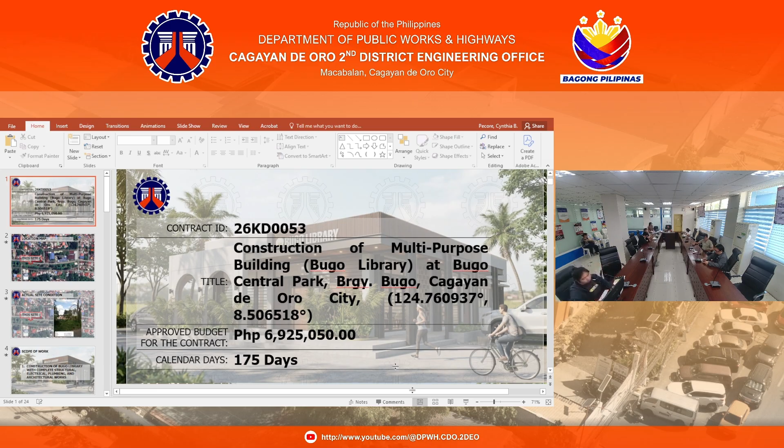This pre-bidding conference is conducted pursuant to the IRR of RA 12009, also known as the New Government Procurement Act. The purpose of this pre-bidding conference is first, to clarify any provisions, requirements, and technical specifications indicated in the bidding documents. Second, to address questions and concerns from the prospective bidders. And third, to ensure that all bidders have clear and uniform understanding of the project requirements prior to submission of bids. Please be reminded that all statements made during this conference shall not modify any provisions of the bidding documents unless such modification is issued in writing through a supplemental or a bid bulletin duly approved and issued by the BAC.

At this point, may I request from the planning and design section to present the following project details: first, the background and objectives, the scope of work and the technical specifications, the approved budget of the contract and source of funds, the contract duration, the eligibility and documentary requirements, and the schedule of bidding activities by the BAC Secretariat.

There is only one project to present under contract ID 26KD0053: Construction of Multipurpose Building, Bugo Library at Bugo Central Park, Barangay Bugo, Cagayan de Oro City, with coordinates of 124.760937 degrees and 8.506518 degrees, with an ABC of 6,925,050 pesos, to be presented by Engineer Marion Basong.

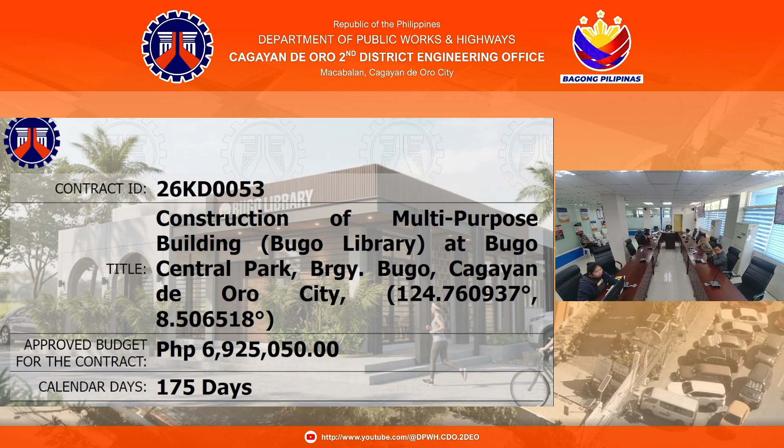Good morning, everyone. I will be presenting to you 26KD0053 with the project title of Construction of Multipurpose Building, Bugo Library at Bugo Central Park, Barangay Bugo, Cagayan de Oro City, with the coordinates of 124.760937 degrees to 8.506518 degrees, with approved budget for the contract of 6,925,050 pesos with 175 calendar days.

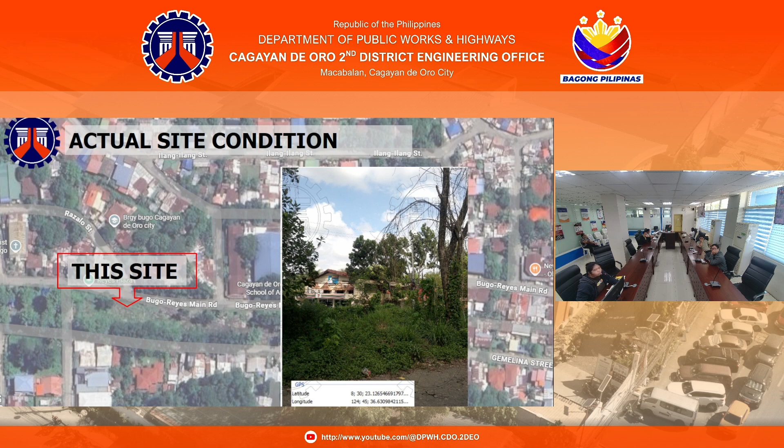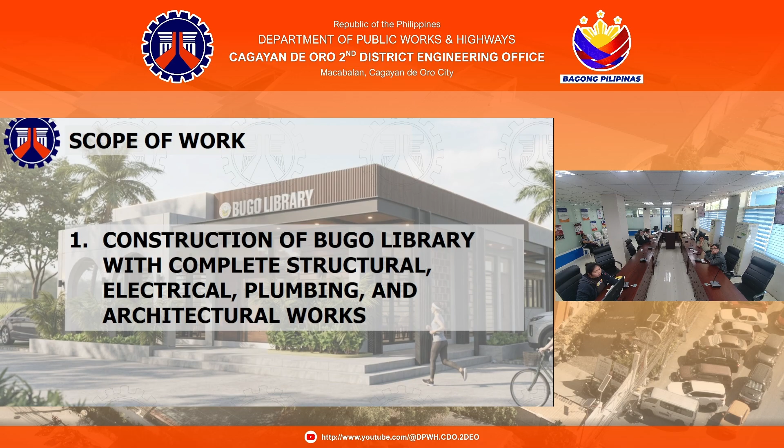So for the scope of work, it will be a construction of Bugo Library with complete structural, electrical, plumbing, and architectural works.

So this is the floor plan. For the floor plan, you can see the community lounge, food preparation area, PWD toilet, and then we also have the e-library and the admin office with toilet. Its area is 18.650 by 12.725 meters, so a total area of 237.32 square meters.

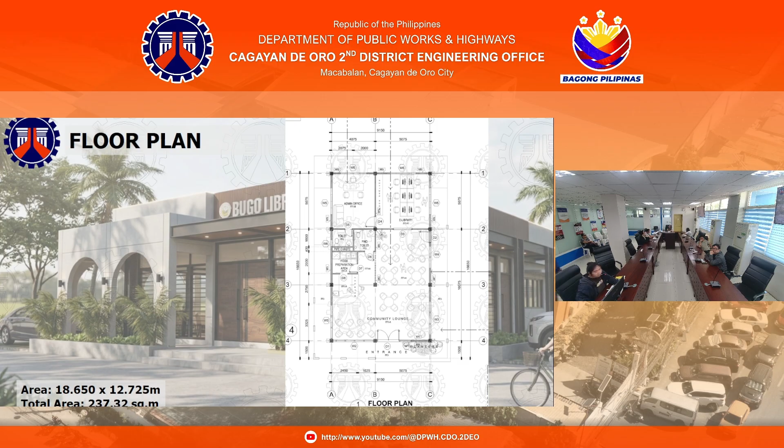And then this is our elevation for the Bugo Library. So this is the front elevation. You can see the logo with the Bugo Library signage. And then we have the right elevation, left elevation, and then rear elevation. And then the total height would be 4.55 meters.

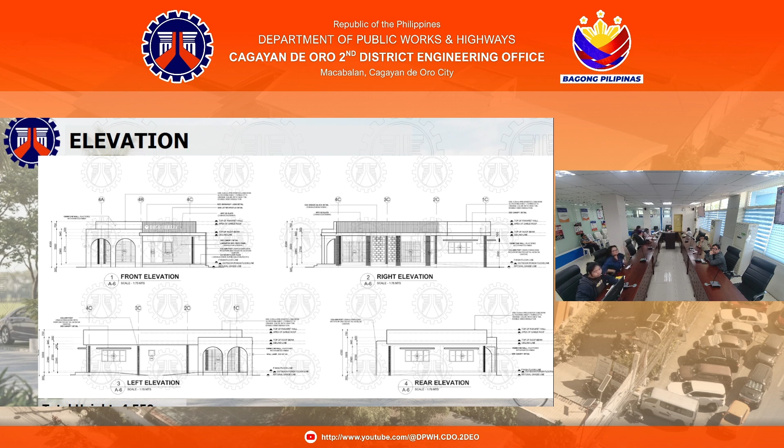So this is the foundation plan. This is the detailed plan for our tie beam. So we will have a dimension of 0.25 by 0.3 for the tie beam, and then we will be using reinforcing steel of 16 mm diameter for the main bars, and then for the ties we will be using 10 mm diameter bars. And we will also have a thickness of 0.1 meters for the slab.

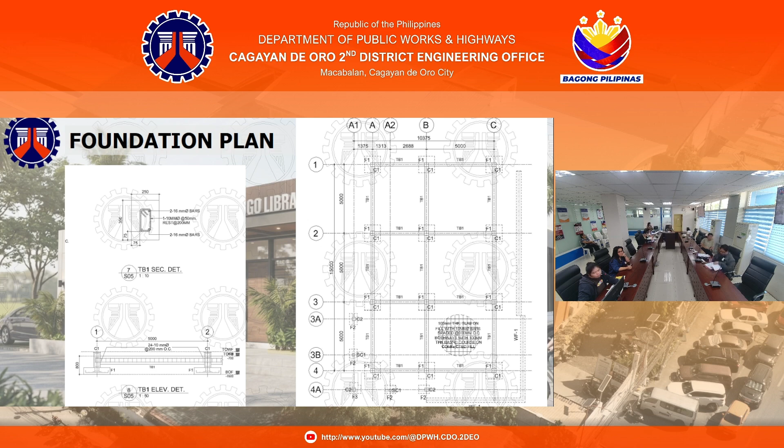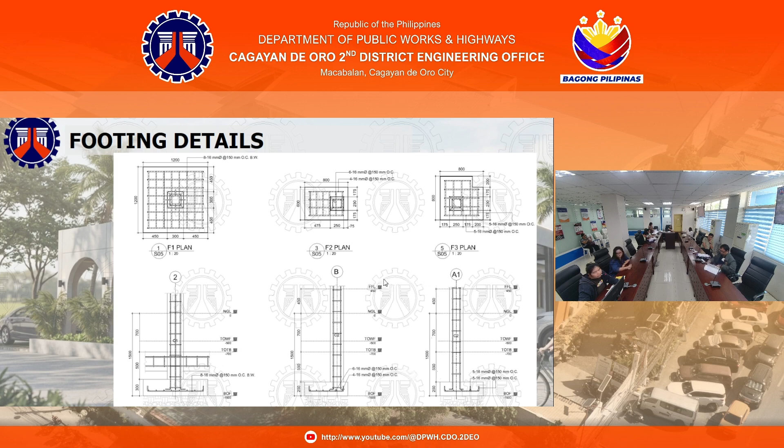And then next is for the footing details. We will have three types of footings. For F1, we will have a dimension of 1.2 by 1.2 and a thickness of 0.3. For F2, we will have a dimension of 0.8 by 0.6 and a thickness of 0.25. For F3, we will have a dimension of 0.8 by 0.8 and a thickness of 0.25. And then we will be using 16 mm diameter bars.

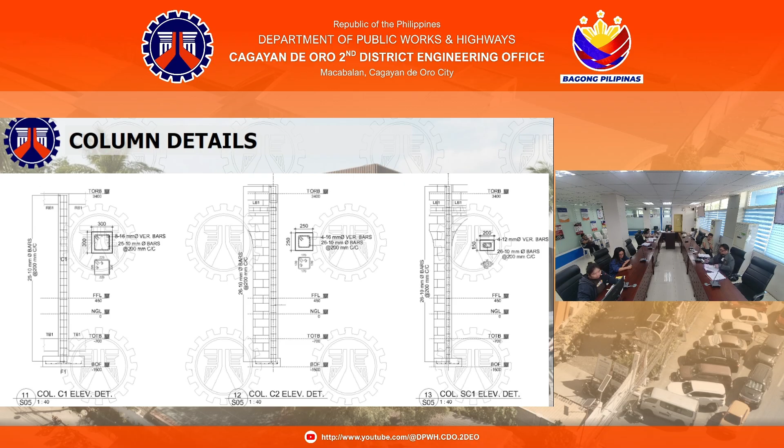So here is the beam details. For LB1, this will be the beam located at the arc on the outside, with a dimension of 0.15 by 0.2. CB1 will have a dimension of 0.2 by 0.25, and then RB1 will have a dimension of 0.25 by 0.3.

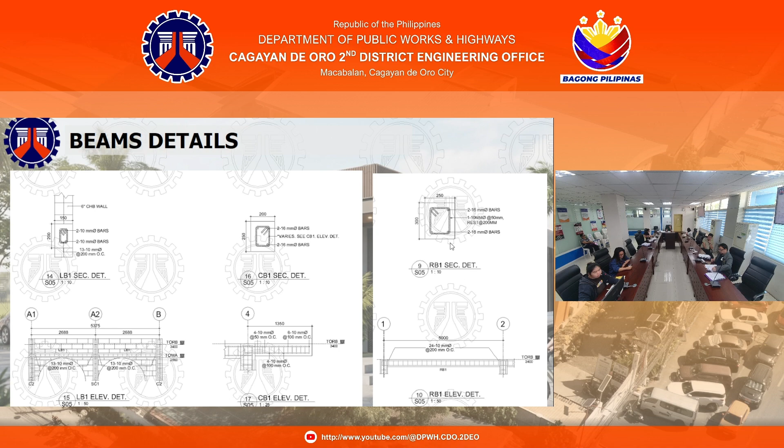So this is the roof plan. For the roofing, we will have an upper roof for the main building, and then a lower roof for the front porch. The upper roof will have an area of 159.298 square meters, and the lower roof will have an area of 7.65 square meters. It will be gable style, using pre-painted long span GI roofing sheet. On the side, outside, there will be a concrete canopy attached.

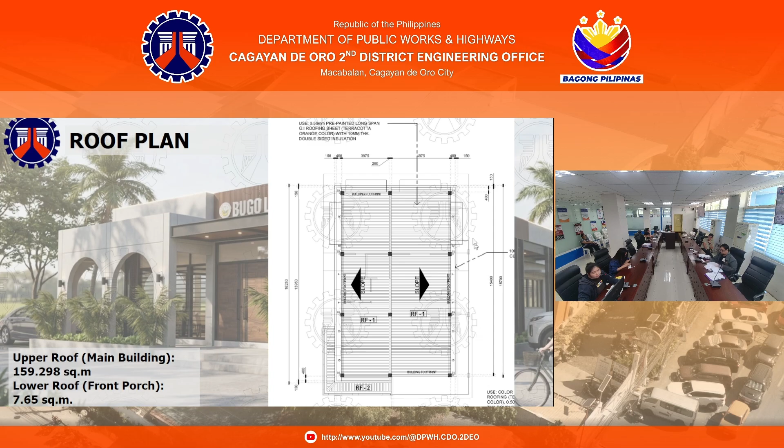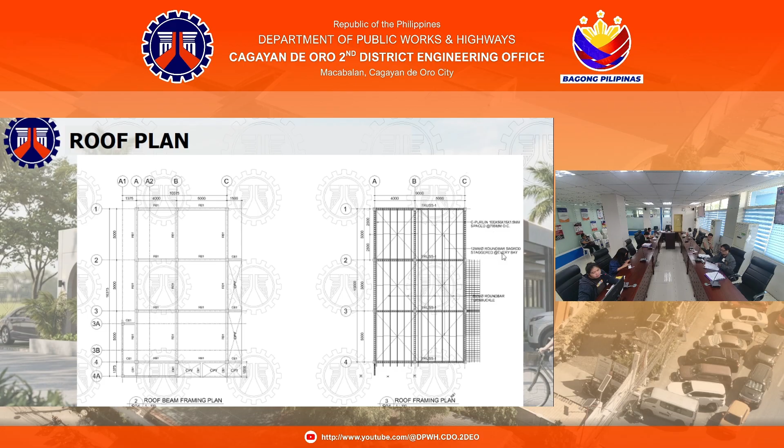So here is the roof beam framing plan and also the roof framing plan. For the roof framing plan, we'll be using C-purlins, round bar sagrods, and round bar turnbuckle.

So this is the isometric view for our Bugo Library. By front porch, I mean the arc on the outside for the front porch.

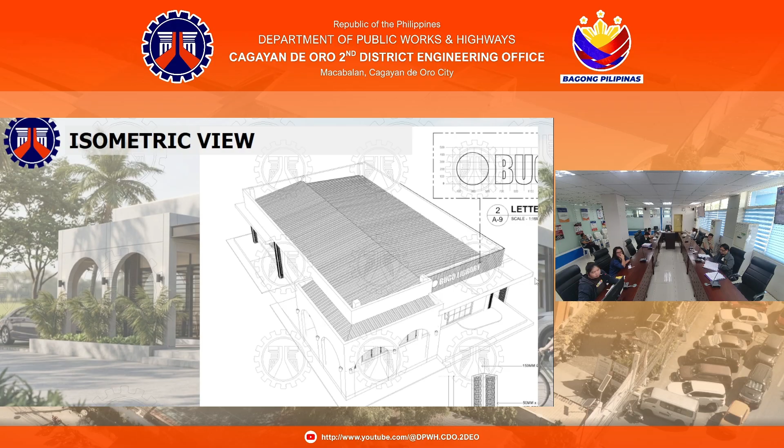So for the architectural work, we will have the front door, and we will be using Jalo Plus for the windows at the front. For the side, we will also be using a breeze block with a dimension of 0.2 by 0.4. And then we have a downspout trellis to cover the downspouts.

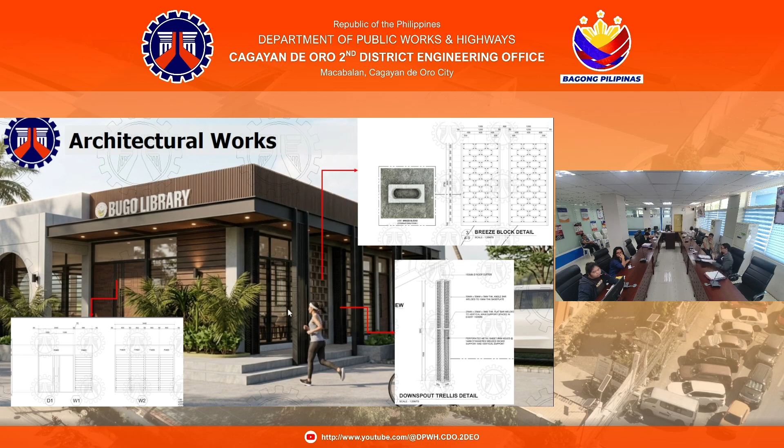For the ceiling, all will be having a 4.5mm fiber cement board, but for the community lounge, it will be an architectural rectangular tube ceiling instead. And then on the outside, we will have canopies with a concrete ceiling finish. At the canopy in front, the ceiling would be a vinyl soffit solid.

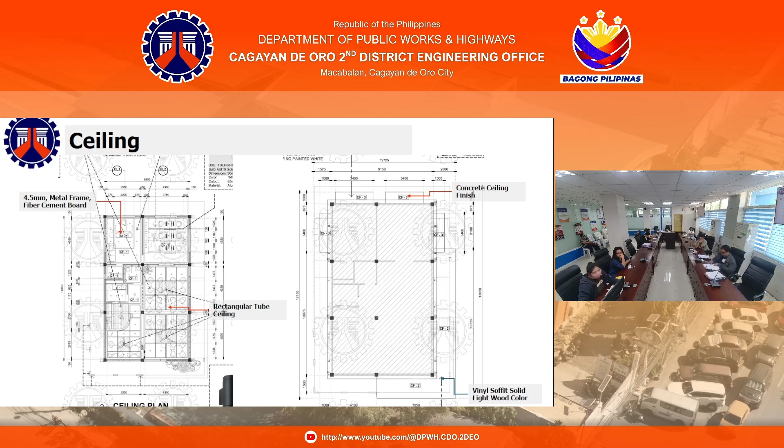Next is the schedule of doors and windows.

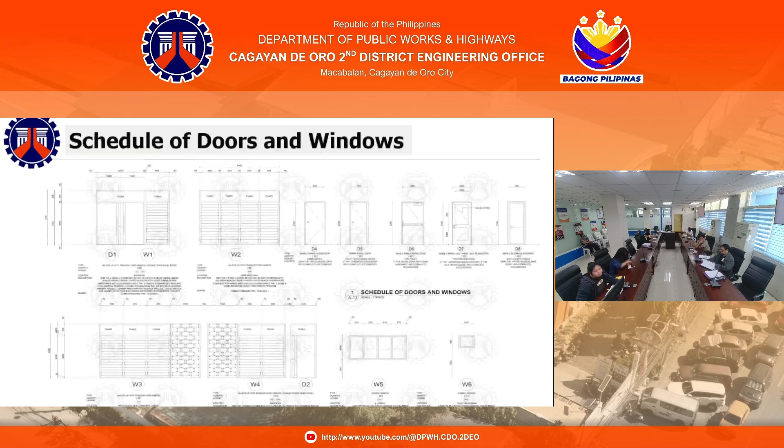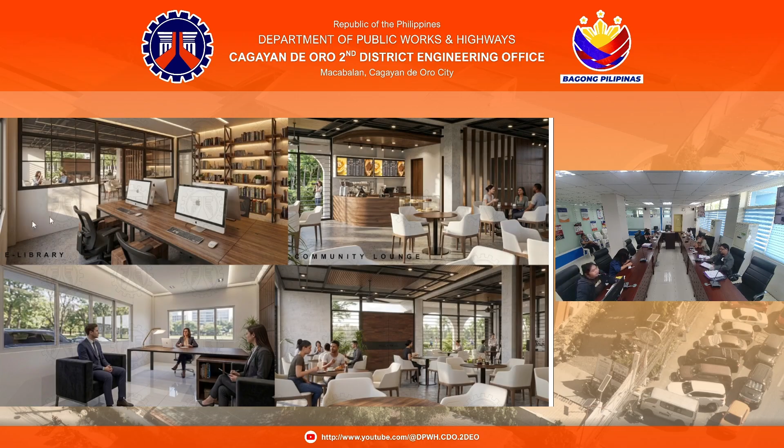So here is the perspective of the Bugo Library. For the e-library, included are the tempered glass and doors. Tables, chairs, and shelves are not included, but the ceiling and lights are included. Same for the community lounge - included are the WPCs, counter, and ceiling, but tables and chairs are not included in the scope of works. Same for the admin office, the table and chairs are not included in the scope of works.

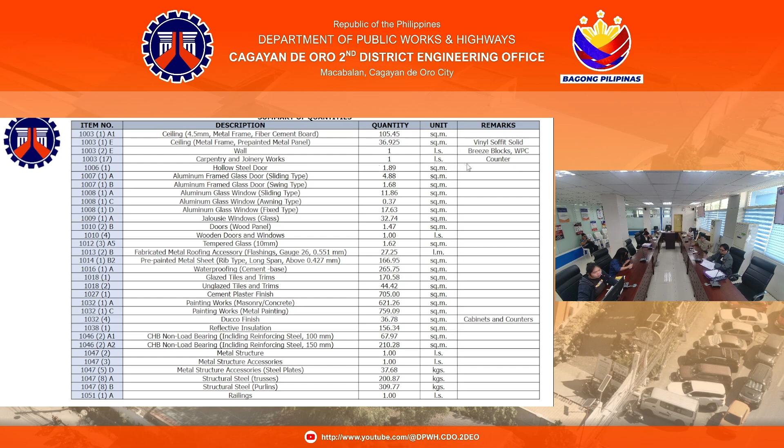We will also have a ceiling of fiber cement and a ceiling of pre-painted metal panel. This is for the vinyl soffit solid. And then we have the wall - this is for the breeze blocks and the WPC. We have carpentry and joinery works - this is for the counter, hollow steel door, aluminum frame glass door, sliding, swing. And then we also have aluminum glass window - sliding, awning, fixed type.

And then we have the Jalousie window - this is for the glass. And then we have the doors for the wood panel, wooden doors and windows, tempered glass, fabricated metal roofing accessory, pre-painted metal sheet, waterproofing, glazed tiles and trims, unglazed tiles and trims, cement plaster finish, painting works for masonry and metal painting, Ducco finish - this is for the cabinets and counters.

So reflective insulation, CHB non-load bearing 100mm and 150mm, metal structure accessories for steel plates, structural steel for trusses and purlins, and then railings.

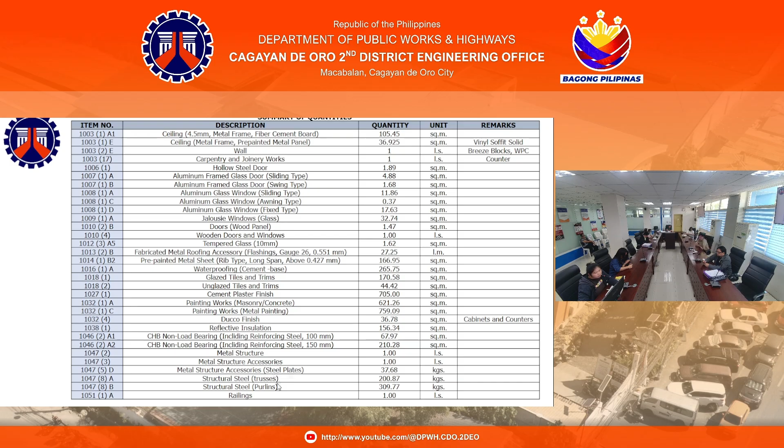And this is the minimum equipment requirements for the project.

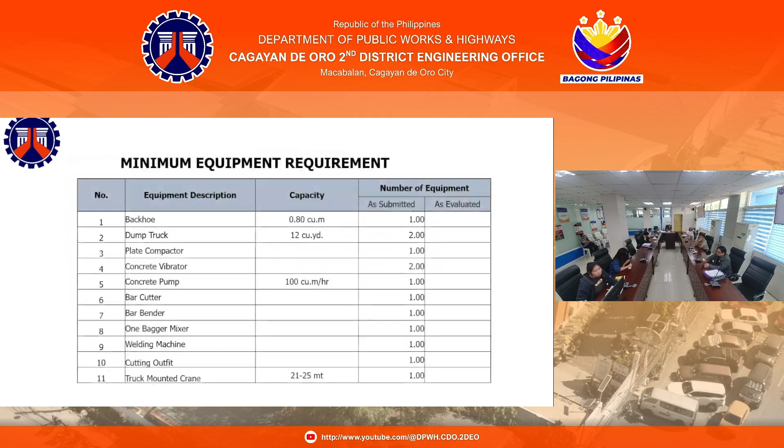That's all. Thank you. Thank you, Yon. Any question or clarification regarding the project? Mar, good morning. Yes, sir.